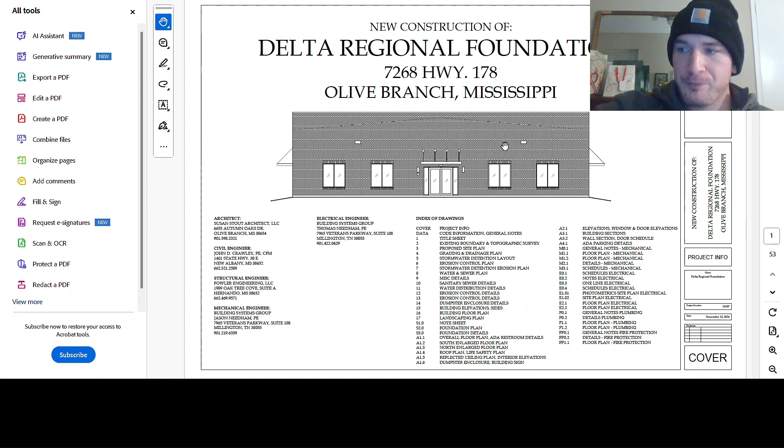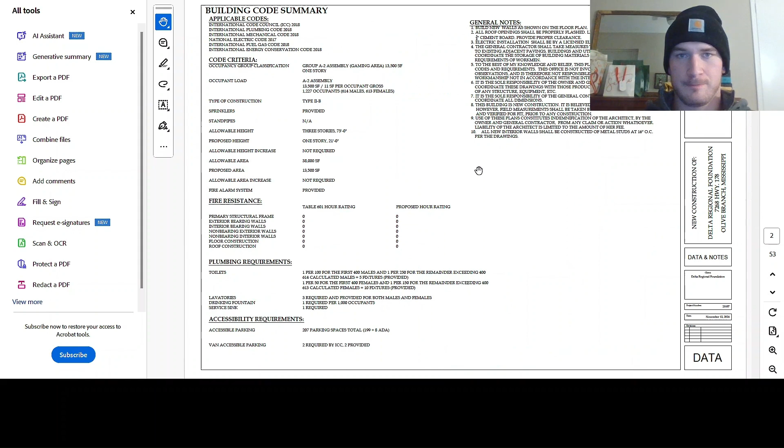First things first, Delta Regional Foundation, Olive Branch, Mississippi. Here's all of our pages, all of our architects. Cool. Talk to them if you want to. Building codes, Spanish to me. So we're near Mineral Wells. Looks like right here. I know exactly where this is. All right, so looks like we're looking at 5.39 acres.

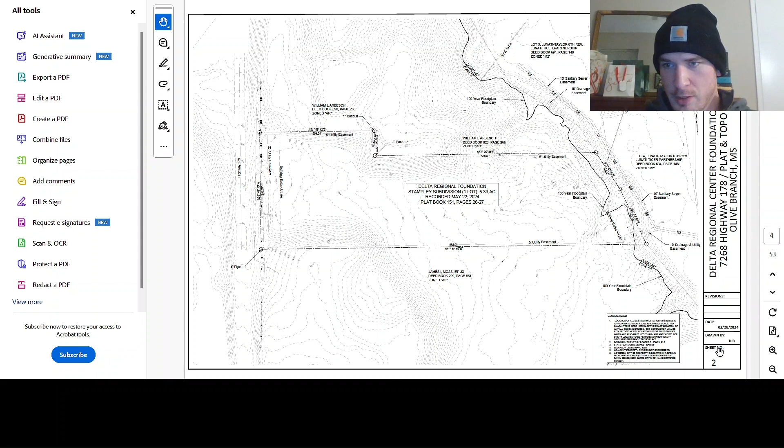I'm just looking for anything important, like say there's a bunch of stuff going on up here, maybe a bunch of utilities, anything that can get in the way that I can mess up. It's going to cost me a bunch of money because you know I don't like spending money to do jobs. I like making the money. Doesn't look like there's anything really particular here. I'm going to keep scrolling through.

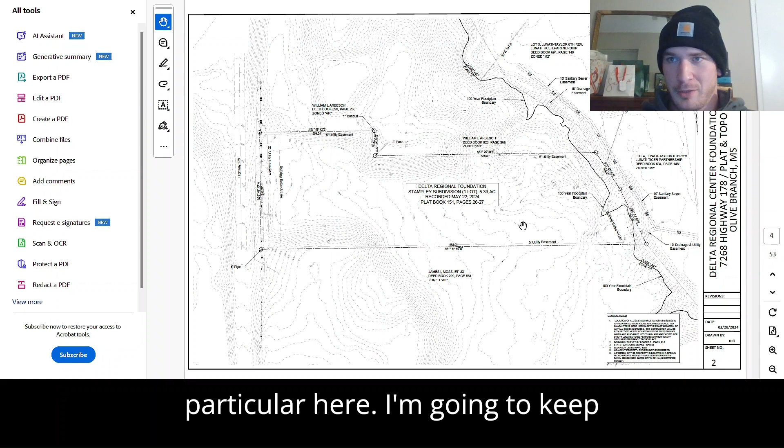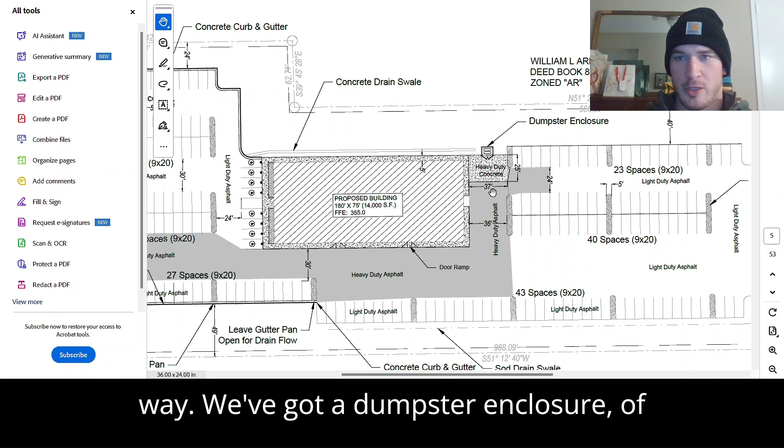All right, so here's our site plan. So let's go through and just take a look at kind of what's going on. So we got our building, 14,000 square feet. That is a pretty large building, which means this parking lot is going to be pretty big. Got a bunch of curb and gutter, concrete drainage swales. Looks like it drains out this way. We got a dumpster enclosure, of course, more parking, heavy duty, light duty. Heavy duty makes sense. This is all delivery zones.

This is all parking. So first thing I like to do is I like to look at my plan, look at my asphalt, my heavy duty asphalt. Because what we do is we'll come in and we'll do all the dirt and we'll lay all of the base rock for the parking. We don't do any of the paving, but we do lay the base rock.

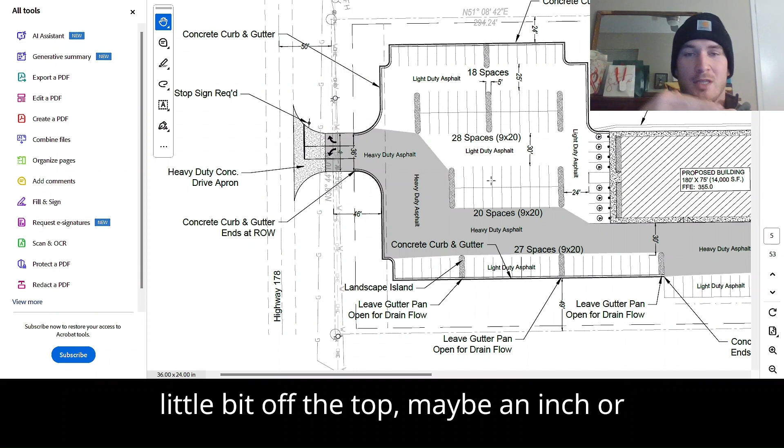And what we do is in our exclusions, we put, hey, we're going to get it as close to the level that you guys want it, but it's up to your asphalt guy to come in and do his final grade. Makes it a little bit easier on the asphalt guys. That way they don't have to lug in a bunch of machines and start trying to spread all the stuff in a confined space. We're already there doing it. All they got to do is come in, cut a little bit off the top, maybe an inch or so, move stuff around. Makes it easy on everybody.

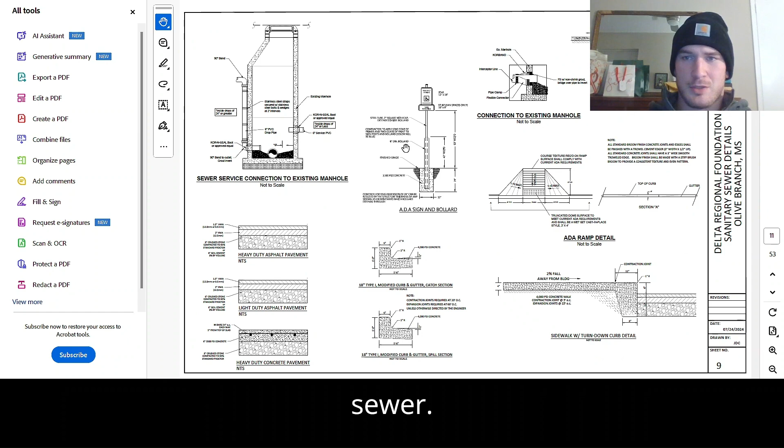So the first thing I want to do is I want to figure out how much base is going to be under this light duty and how much is going to be under this heavy duty. And then we're going to figure out how much square footage it is to see how much rock that we need. So I'm going to go ahead and skip ahead and go down to some details. This is a sewer. Here we go. Here's our pavements right here.

So we got heavy duty asphalt, 1.5 and 2, 8-inch crushed stone or 8-inch soil cement. Now, if they give the option of soil cement, I pretty much never put a price on the stone because soil cement is remarkably cheaper than putting a stone base. Now, that's not to say that they won't, but it is to say the likelihood is really low, so I try to not really do a ton with it.

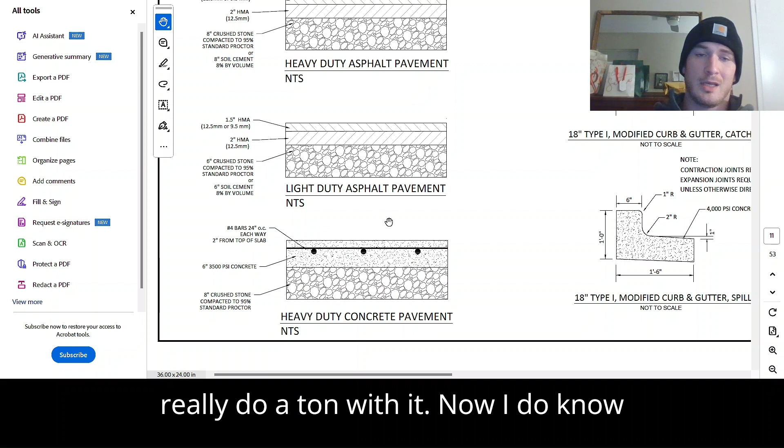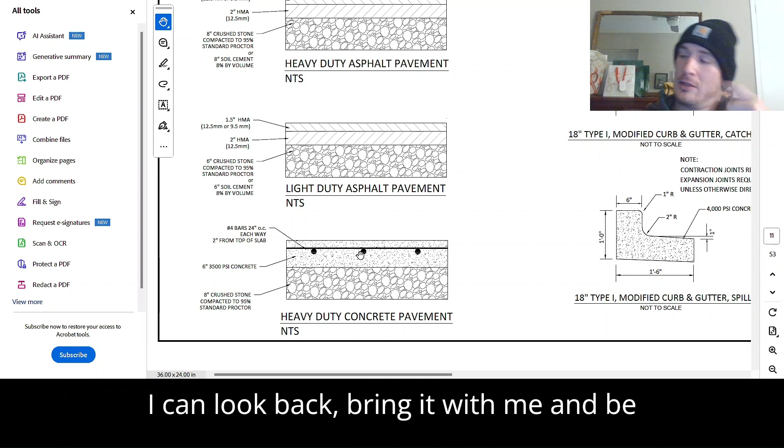Now, I do know that there's going to be some heavy duty concrete pavement, so I'm going to do 8-inch concrete base and draw a line. So I got my handy dandy notebook right here. I write everything down because what I do is I build it in my template sheet and then I have all my notes. So when I go to do the job later, I can look back, bring it with me and be like, oh, you know, I noticed this about it.

So we got our 8-inch concrete right here. I'm going to go ahead for the sake of the video. We're going to do a 6-inch asphalt base.

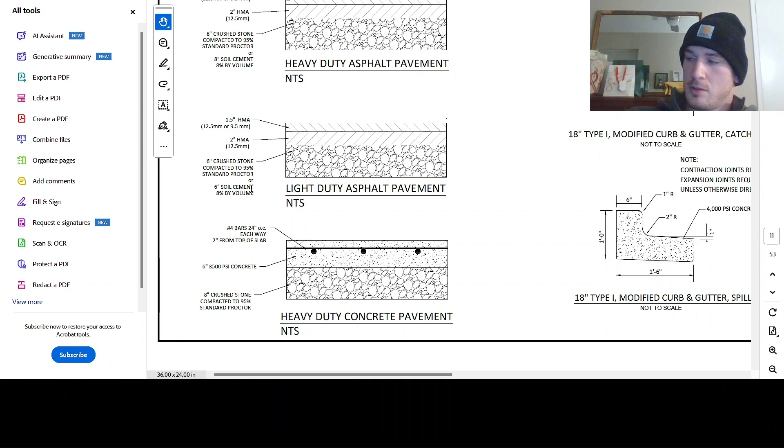And we're going to do 8-inch asphalt base. All right, now we're going to scroll back up to our site plan, down one more. Now we're going to do some measuring. So we see our scale is 1=50. I'm going to come down here to my measure objects, my measuring tool, right click, make this 50. We're not in inches, baby, we're in feet.

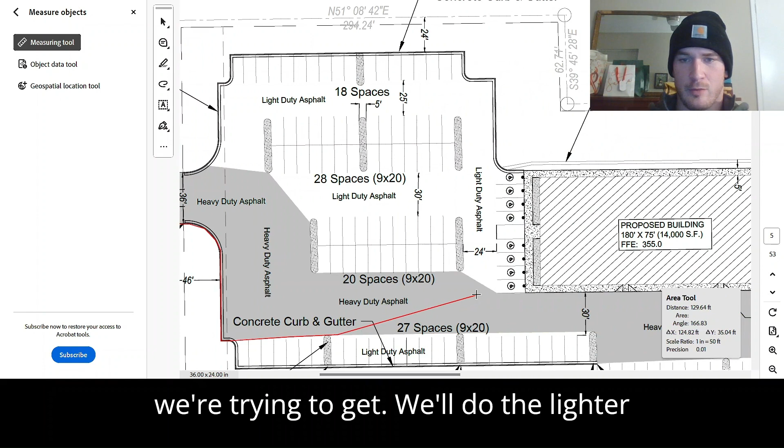Let's go ahead and zoom in. I'm going to go ahead and knock out the heavy duty asphalt first. So I'm going to hit my area tool, start to trace it out. You guys already know what's going on with this one. Again, I'm just following this shaded region because that's the only area that we're trying to get. We'll do the lighter area in a second, but for now we're just going through the heavy.

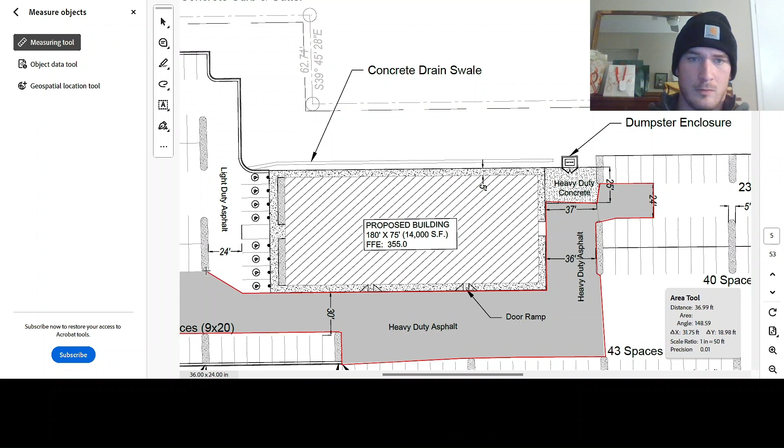So again, I'm focusing up right here just because I'm tracing lines and I went to public schools, and so it's really difficult for me. So we got 45,355 square feet. So let's go ahead and hit the math on that. Let's go ahead and pull up our handy dandy calculators. We got 45,355. Now we got to do it in inches.

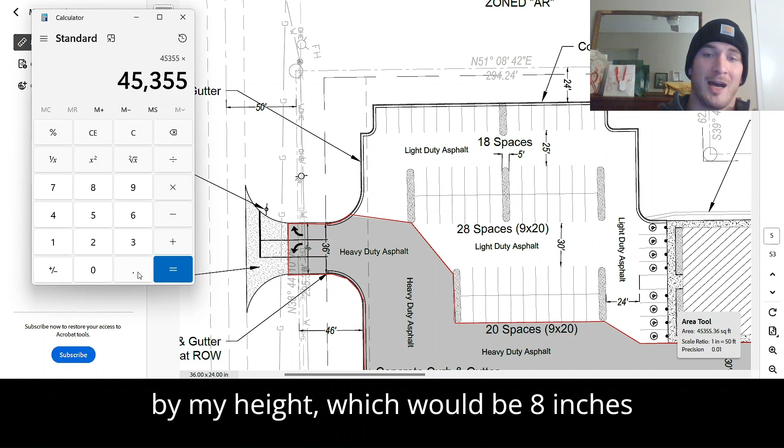If you don't know how to do inches to feet, take your inches. So in this case, we're looking at 8 inches. I'm going to go 8 divided by 12 inches in a foot. That gives me 0.667. So I'm going to take my number right here, 45,355, multiply it by my height, which would be 8 inches, 0.667. Now this is cubic feet. Again, I'm transferring this to cubic yards because that is the universal construction measurement. So I divide by 27.

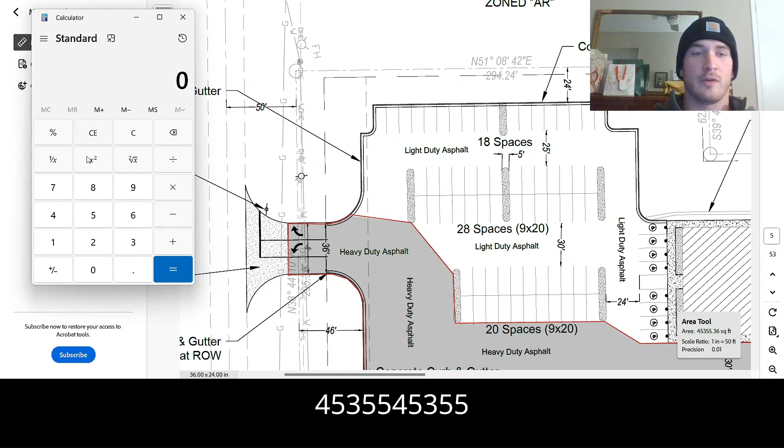Whoops. Oh man, 45,355. 45,355 times 0.667 equals, divide that by 27. So we got 1,120 cubic yards. Now, with crushed limestone in particular, it is not like a 1-to-1. So 1,120 cubic yards does not equal 1,120 tons. And you buy the material in tons.

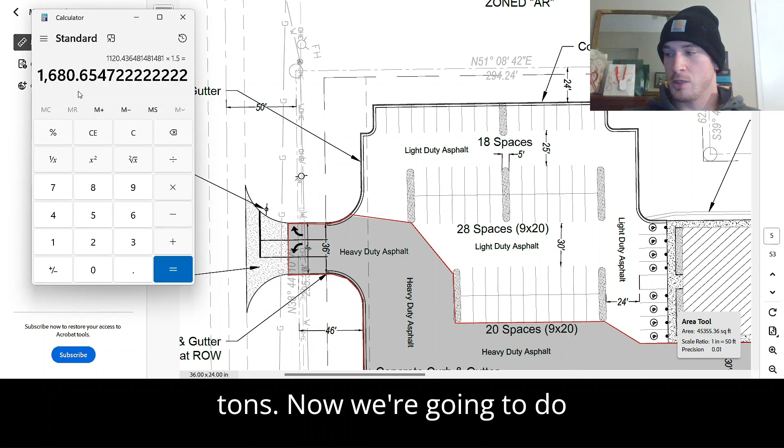My conversion factor is 50% more. So per cubic yard, we have 50% more in a ton. So I take this number and I multiply by 1.5. Now I'm at 1,680 tons. So I'm going to go ahead and write that down for my 8-inch asphalt base. 1,680 tons. Now we're going to do the same thing with light duty. Really simple, not remarkably exciting.

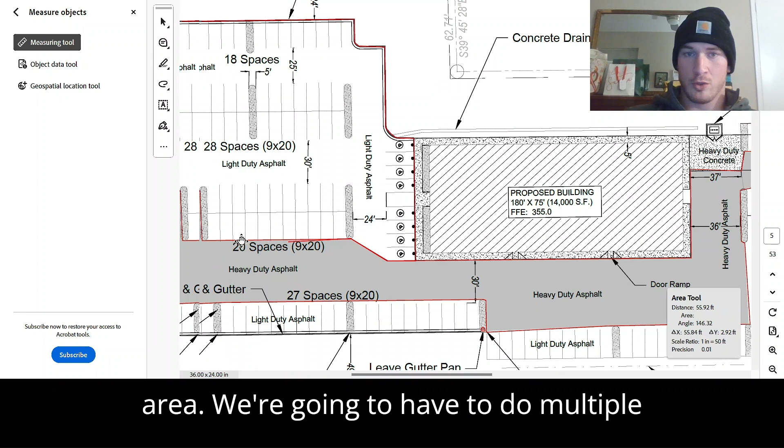Again, I'm just tracing around all of this. Here's my proposed building, so I'm going to skip that. I'm just going to hit this area. We're going to have to do multiple measurements on this one because they split us up a little bit. Follow it around, connect it up. This is about to be a lot of stone, boys. A lot of stone.

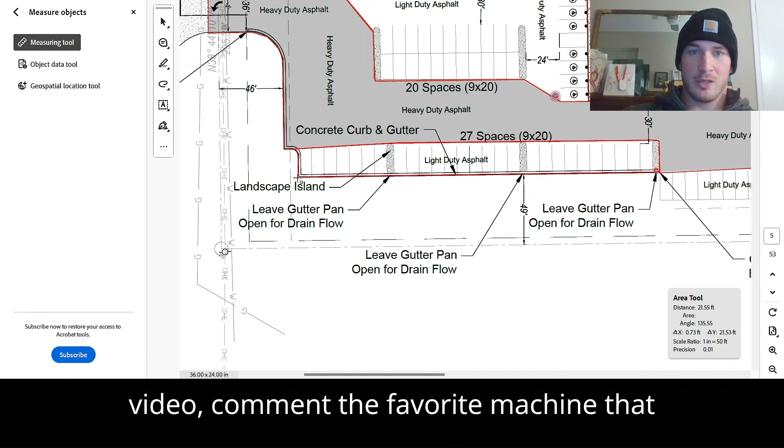Mine is probably Link Belt 210. It's like the best perfect size excavator, can knock out almost anything. You can use it for demo, you can use it for pipes, you can use it for moving dirt. 210 is just like an absolutely remarkable machine to me.

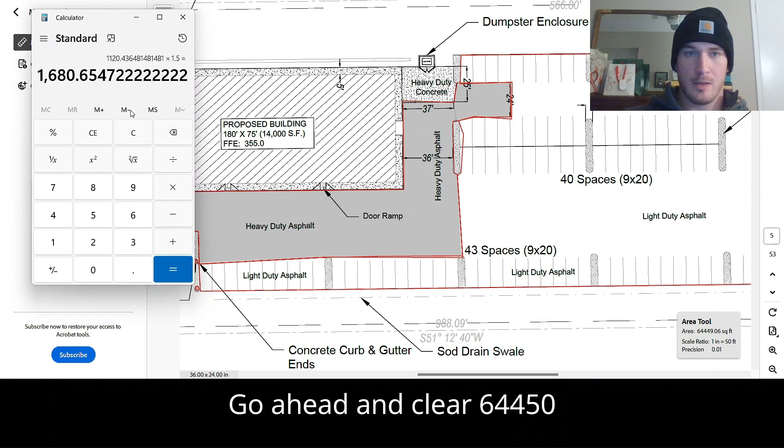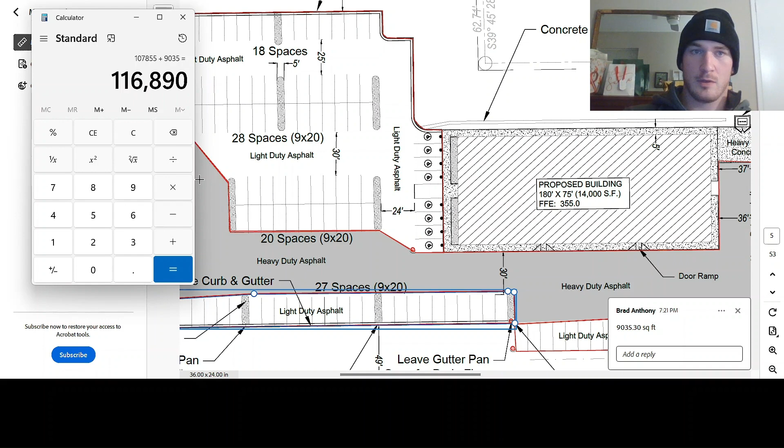Look, you guys see that really terrible tracing right there? I wouldn't worry about it too much. Mind your own business. All right, so now let's do some adding. So we got 64,450. Go ahead and clear, 64,450 plus. Let's come over here. 43,405. I'm going to add a round up. 43,405. And then we're going to hit this little section right here. 9035 plus 9035. So we got 116,890 square feet.

Again, 6 inches is half of a foot. Half of one is 0.5. Easy conversion. You don't even have to do it on here. So I multiply by 0.5. Again, divide that by 27, get to my cubic yards. We got 2164, but we're hitting our conversions. Times 1.5. 3247. Again, I'm making these notes. All right, let's keep her going. Let's go ahead and delete all these things out of here. So we're about to do a little bit of curb and gutter takeoff while we're here.

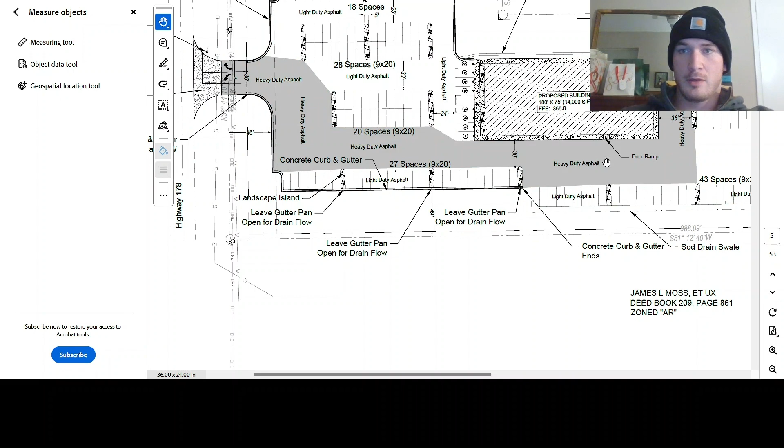Let's go back to our measuring tool. This time we're going to use this perimeter tool. It lets us trace lines and make bends in it. If you use the line tool, you're just going to run a straight line, and you're going to be like, hey, dude, I got to make 500 straight lines for me to measure one thing. Go ahead and go to that perimeter tool, big boy.

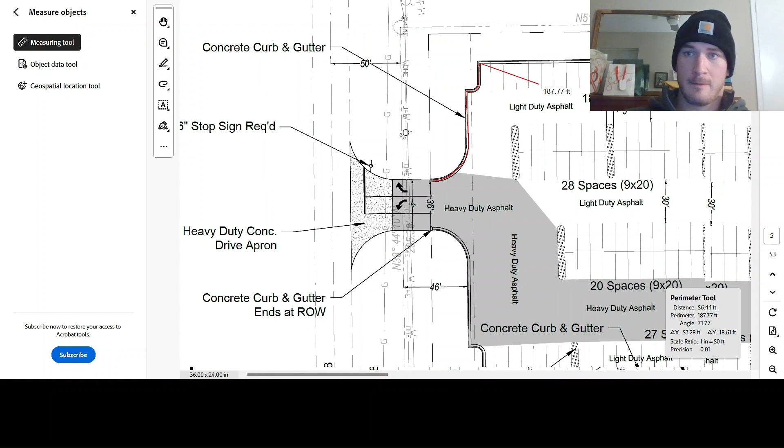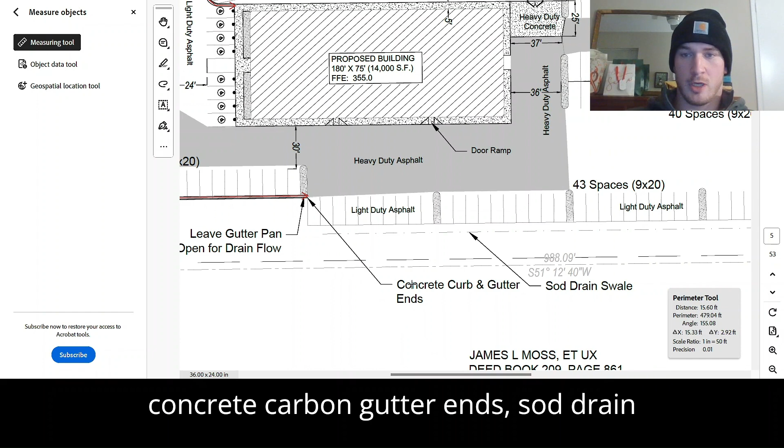480 feet of curb and gutter right there, baby. Let's go ahead and run this over. I don't really know why it looks like they stopped that curb and gutter right there, but 480 feet. Leave gutter pan open for drain flow. That's why. Concrete curb and gutter ends, sod drain swale. So they want it to be running off into this ditch. Makes sense.

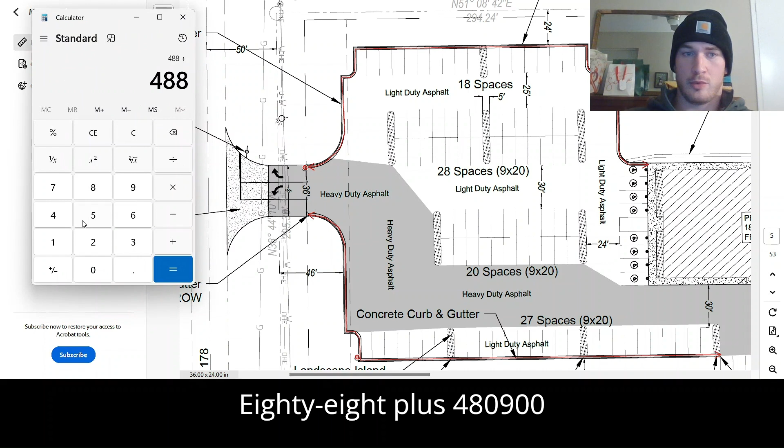Looks like we don't have any more curb and gutter, so I'm going to go ahead and make a mark of this. 488 and 480. 488 plus 480, 968 feet. So curb and gutter, 968 linear feet.

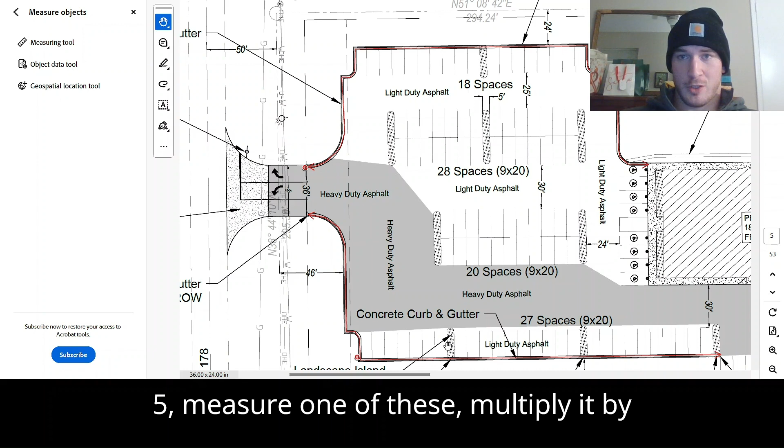While I'm here and we're doing concrete, let's go ahead and knock out these islands because they're quick and easy. Realistically, all you got to do is measure one of these and multiply it by 5, measure one of these and multiply it by 3, and then just translate it to over here. So that's what we're going to do. Measuring tool. Let's go ahead and measure one of these. About 155 square feet.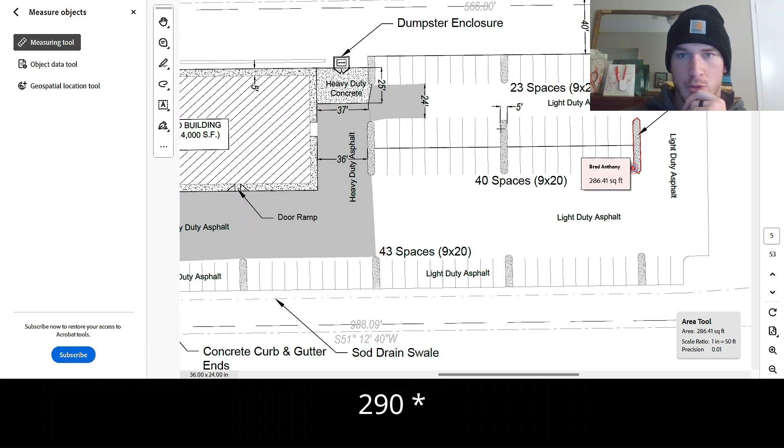Oh, good heavens. We're not going to do that. Let's go ahead and make this one real tight. Blam, blam, blam, blam. We're going to call that 290. So let's do 290 times 1, 2, 3, 4, 5, 6, 7, 8. I'm going to make a note. 290 times 8. Is that what I said? 1, 2, 3, 4, 5, 6, 7, 8. Yeah. And now we got 155 times 1, 2, 3, 4, 5, 6, 7, 8, 9.

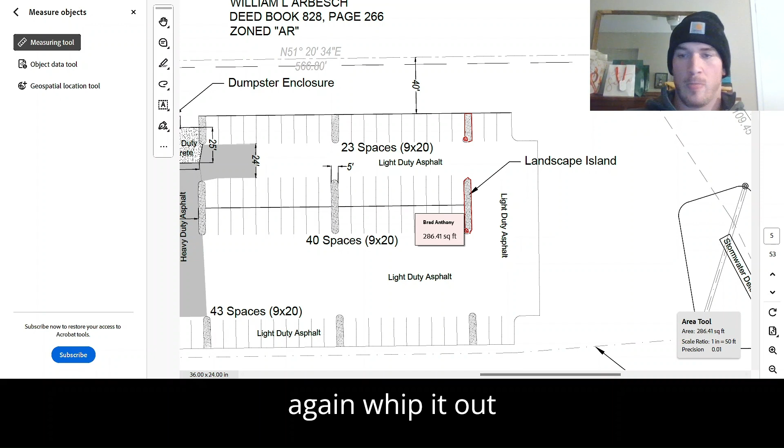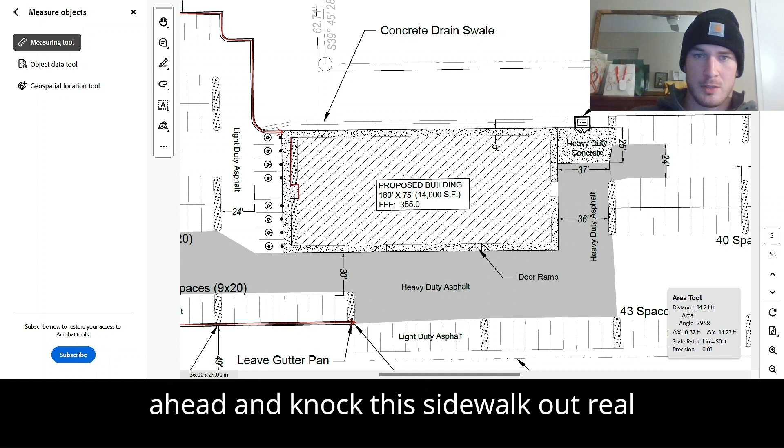While I'm here, I'm going to go ahead and do this undercut. So pretty much all the buildings, we got a little bit of sidewalk. I'm going to knock that out too. Man, I'm a little all over the place, boys. I'm sorry. Let me just go ahead and knock this sidewalk out real quick. Again, this is just me raw looking at these plans. First time, never seen them before. But this is typically how I go about it. It's a little chaotic, but we get it done.

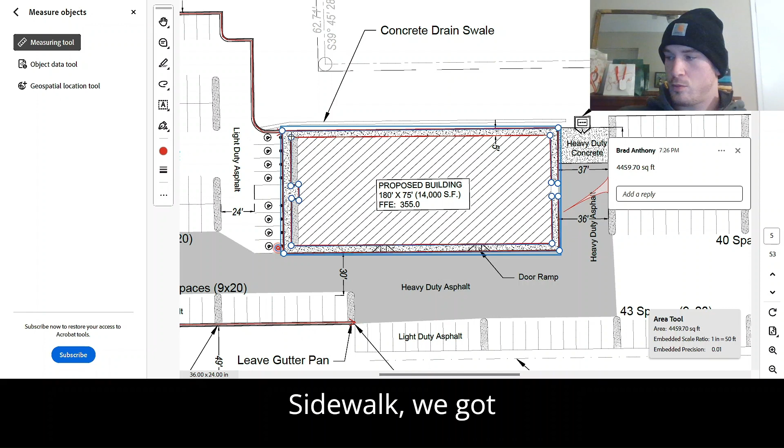Sidewalk. We got 4,460 square feet. And then HDC, heavy duty concrete. This is probably a dumpster pad. I mean, our county started doing these. 1,440 square feet. All right.

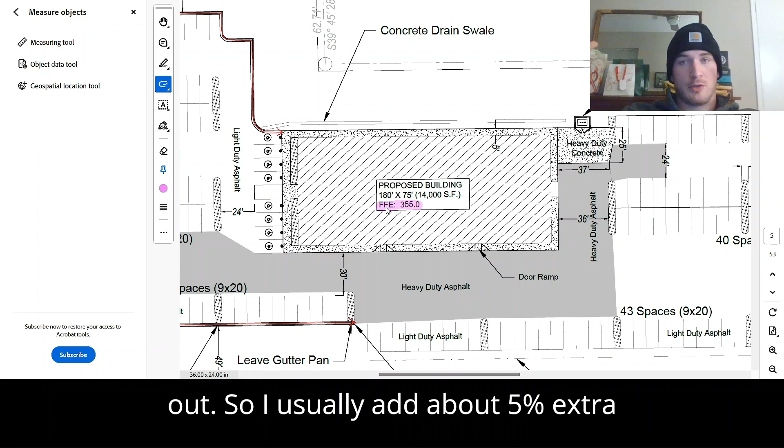So let's knock out the undercut on this building. So typically with us, we have to undercut a building 5 feet, take out all the dirt, bring in better compactable fill, tamp it up in lifts of anywhere from 8 to 12 inches. Now, we have our finished floor elevation. Let me go ahead and go to my handy dandy drawings. We got our finished floor elevation right here of 355. Now, think about when you're building the building. You have to go a little bit out. So I usually add about 5% extra because you go about 10 feet on each side.

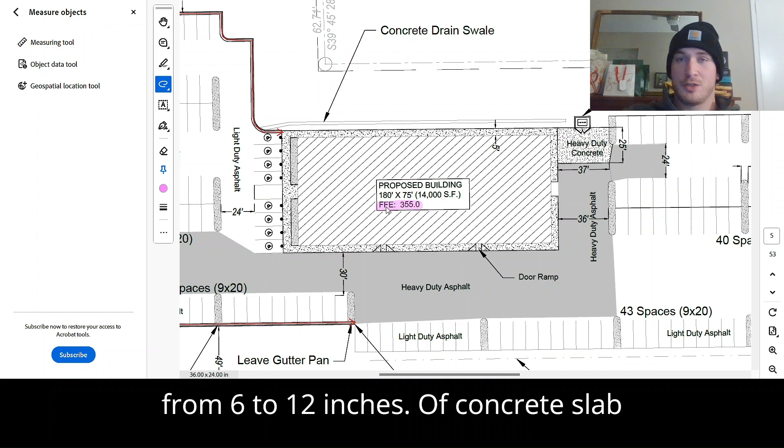Now, with 355, you have to remember I have to build my pad up about a foot or two off the ground, depending on the elevations, usually about a foot. And then I have to have about a foot for my concrete slab and the base underneath it. So typically you're going to get anywhere from 6 to 12 inches of concrete slab, and then you're going to have anywhere from 6 to 10 inches of base underneath it.

So I'm going to go ahead and do this. When I build this building out, I'm going to build this to about 354. I'm going to leave about a foot, right? Maybe a foot and a half. So what I'm going to do is I'm going to cut it down to 353 and a half. And I got to go 5 feet below that.

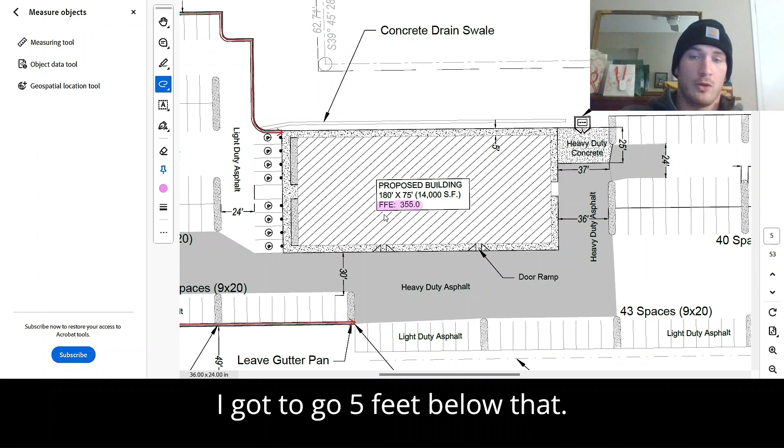So I do my 14,000. Actually, let me do it on screen. Sorry. 14,000 square feet. Multiply it by 5 foot cut. Divide that by 27. So I got to take out 2592. So I'll write down my building pad. 2593 cubic yards out.

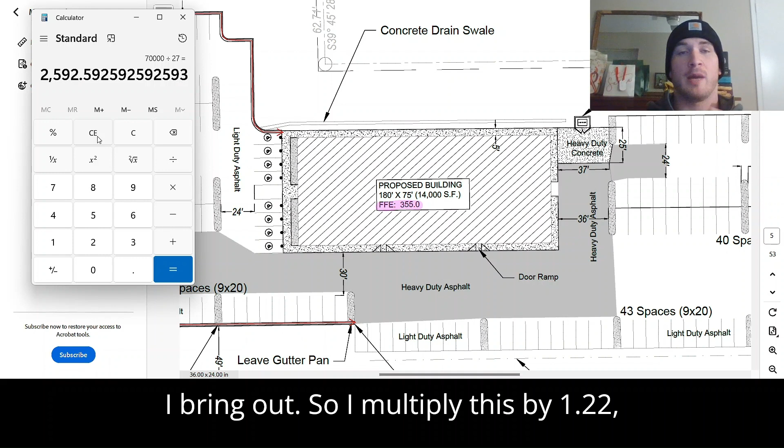Now, again, my dirt is 1-to-1 now with cubic yard to cubic yard because it's the same material. But when I bring it back, I have to compact it. So when I compact it, I need about 22% more material than I bring out. So I multiply this by 1.22. I get 3163. That's the easiest way to knock out these buildings.

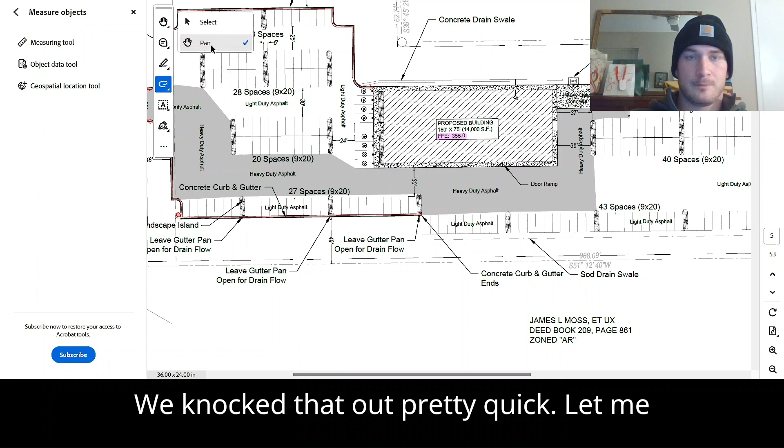All right, let's move on to our next one. We knocked that out pretty quick. Let me zoom out. Looks like we're looking at underground utility locates, concrete inlet, concrete swale, pipe invert. Does this have a chart? Reinforced concrete pipe. That's an arch pipe. All right, I'm going to go ahead and highlight this right here because we're going to need that. And it's got a flared end section.

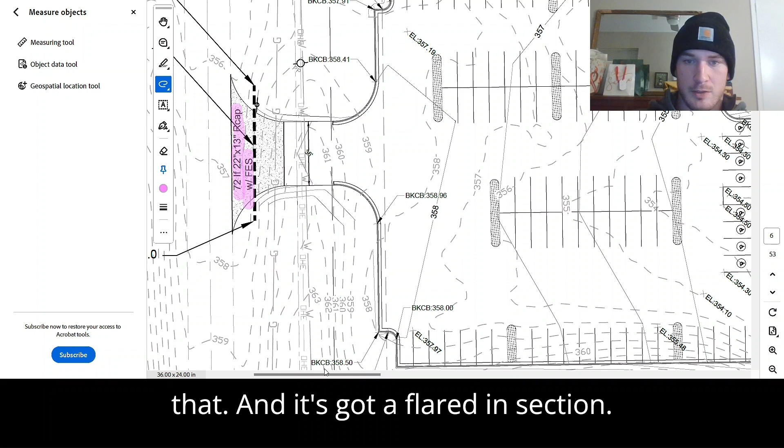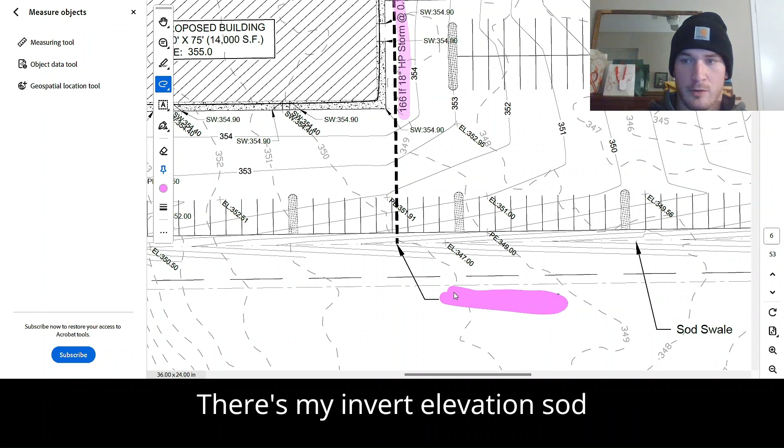Yeah, so it looks like they're not going to be using a lot of underground stuff. So that's a yard inlet right there. Concrete swale probably pours out to here and it hits this. 166 linear feet of storm. Here's my invert elevation. Sod swale. 3-to-1. We got a big old pond over here. Let's go ahead and take a note of that. This looks like an outlet control structure. They didn't notate it, so it's probably not that important for this project.

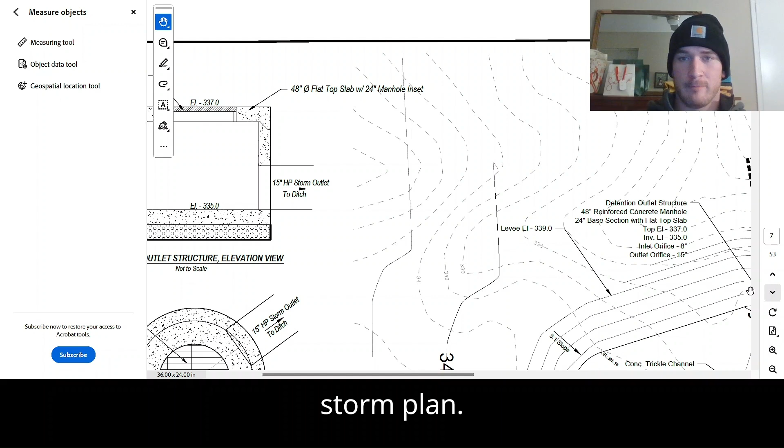But yeah, it looks like everything's just going to be pouring off of this side. So we're at 365. We come down to here. We got 350. Yeah, we got a 15-foot drop from over there. Everything's going to be coming out this way. All right. Well, that was an easy little storm plan. Yeah, here's that outlet structure that it was talking about. Here it is. Second page.

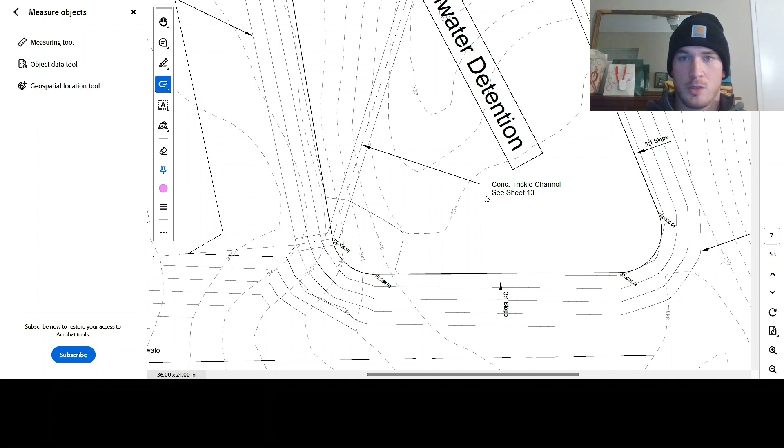Let's go ahead and... manhole, flat top slab. 36 feet of 15-inch HDPE. Concrete trickle channel. Levees at 339. 339. Yeah, it's just an outlet control structure. Cool. These are really easy. All right, what we got now?

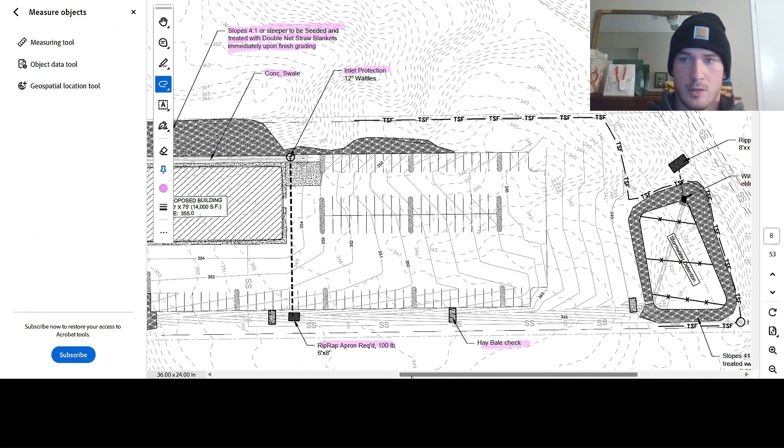This looks like erosion control. Construction entrance. We got silt fence. Double net straw blankets and seed. We got riprap, hay bale check dam, inlet protection, swale, seeded and straw blankets, riprap apron, outlet pipe with concrete. Easy money. This looks like a straw bale too. I'm gonna go ahead and highlight that for it. Looks like another one.

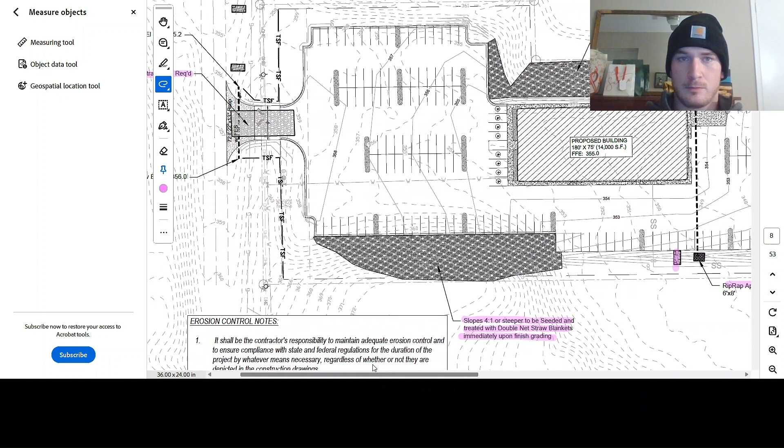Another one. Another one. DJ Khaled.

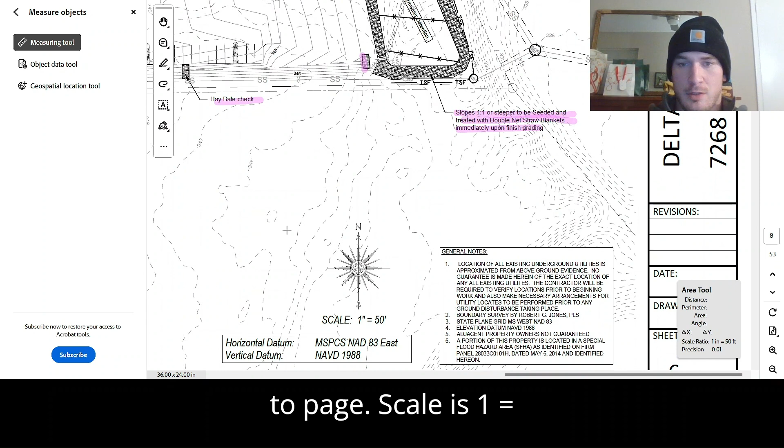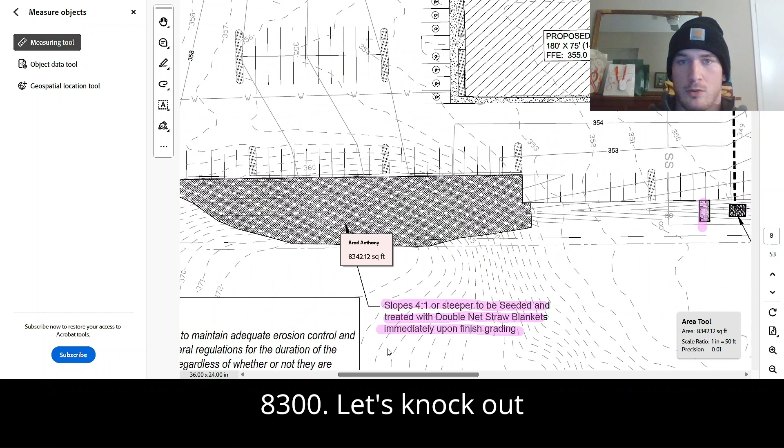All right. So let's get the measuring out of the way. Now look, always double check your scale because sometimes they change page to page. Scale is 1 equals 50. Scale is still 1 equals 50. So let's get our area of all of this seeding. It's going to make it difficult. There we go. 8,300. Let's knock out this area. Cool. And one more.

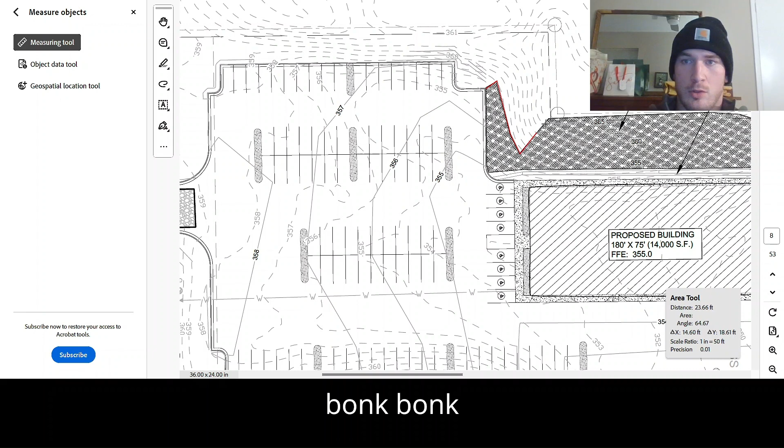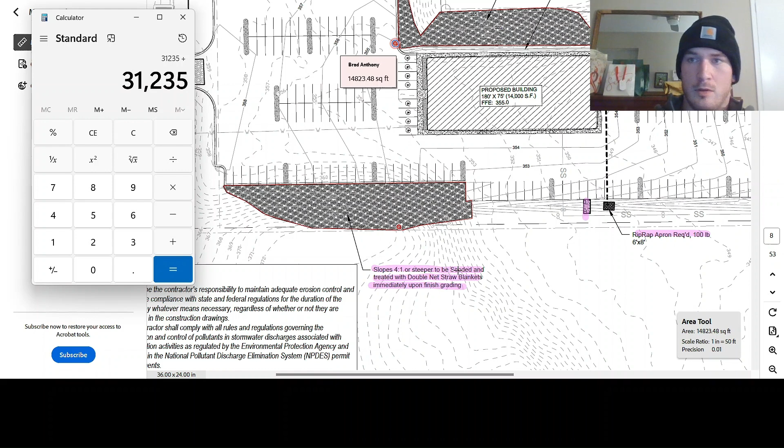This is the absolute joy of estimating dirt work, construction, civil, whatever you want to call it. Running through, grinding these away, making sure that you get all your numbers right. All right, so again, handy dandy calculator. Clear it up. 16,410. 14,825. And 8,345. 39,580.

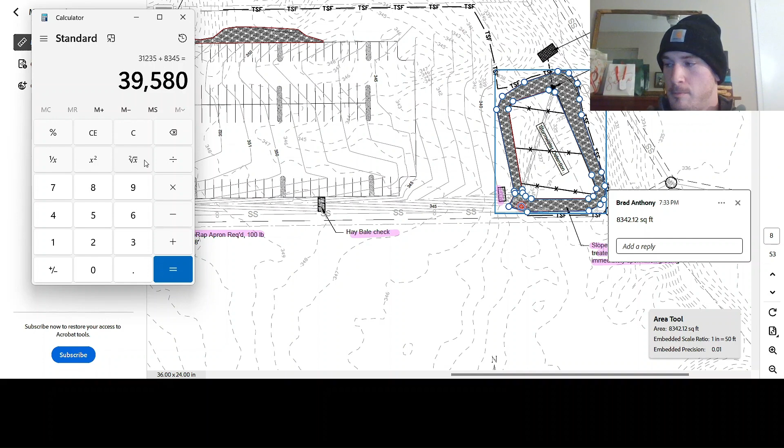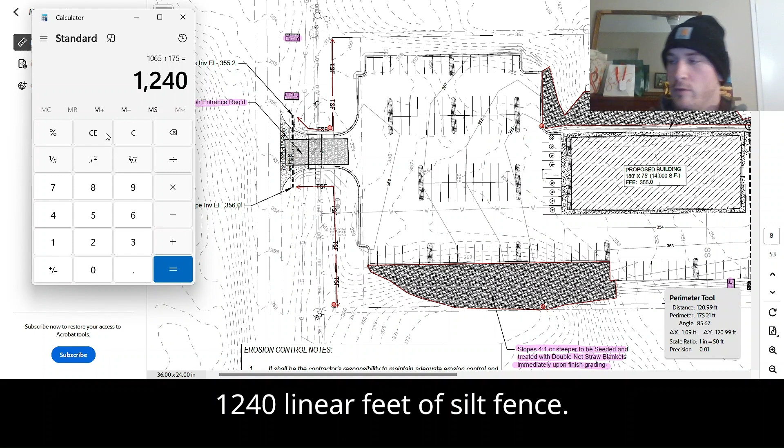Next, we're going to hit up this silt fence real quick. Everybody's favorite item. I'm going to call that 855. A little bit more fence up here. 855, we'll call that 210. 1,240 linear feet of silt fence. Easy money.

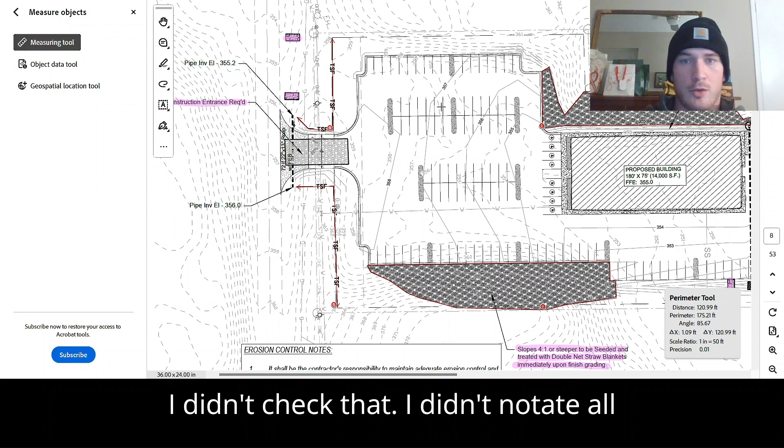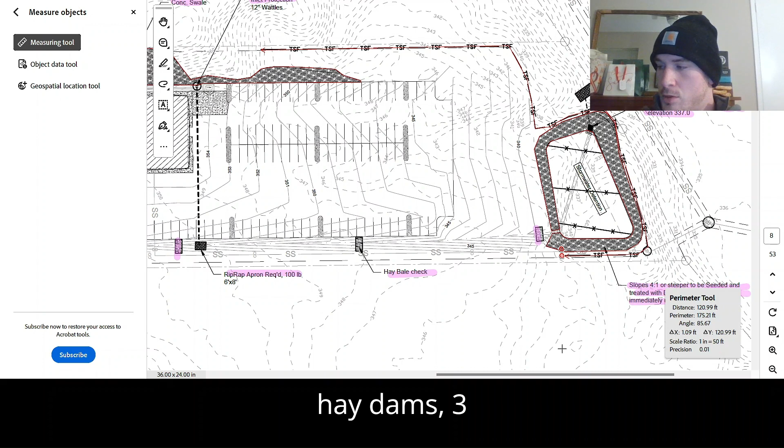One construction entrance. I didn't notate all this pipe. I gotta go back and do that real quick. So inlet protection. 1. We got the seed. We got 1, 2. What is it? 3 hay check dams. Hay dams, 3. Riprap. So we got 8 by 12, 6 by 8.

So 8 times 12, 96 plus 48 square feet. Again, this is my square footage for this riprap. It's usually 1.5 feet deep. Divide that by 27. Now with riprap it's big rocks and there's no fill material between it, so it's not really compactable. So you have to use a bigger conversion number. I use 1.8. It's 14.4. I'm going to put it to 15 tons.

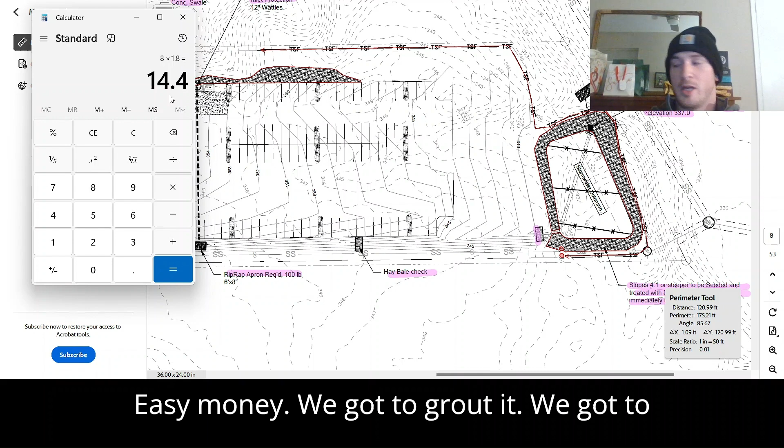Easy money. We got to grout it. Grout's literally just like cement. Pour it on the top, makes it a smooth surface so the water doesn't run through it. Really easy.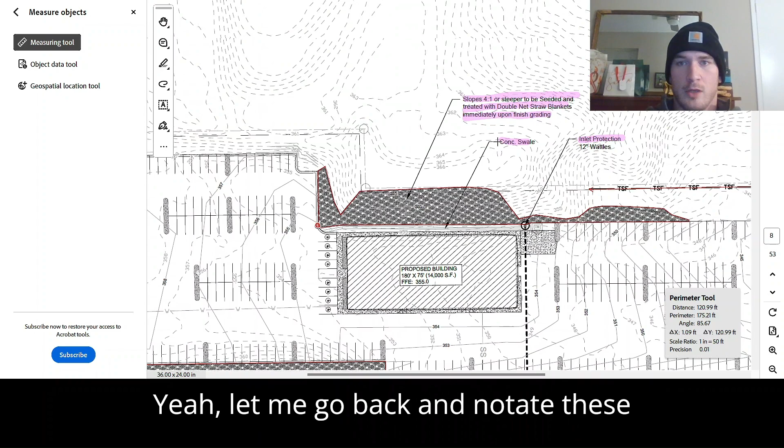Yeah, let me go back and notate these pipes real quick because I forgot to do that. We got 166 feet, 18-inch HP, 166 linear feet. I wonder if there's a head wall or anything on it. I don't know.

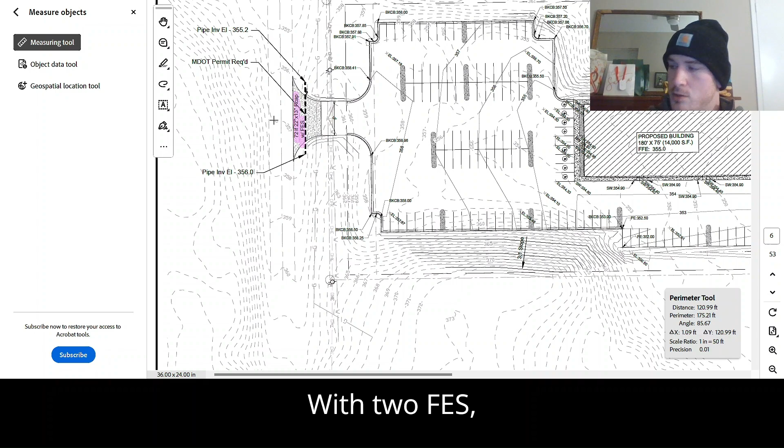72 by 22 by 13. Oh, 72 linear feet. Okay. So we got 22 by 13, 22 by 13. Arch pipe. We got 72 linear feet with 2 FES. Easy money. Keep it going. We hit our erosion control.

We hit our drainage. The guy that I'm bidding this for doesn't really want to do any utilities, so I'll probably just leave those off.

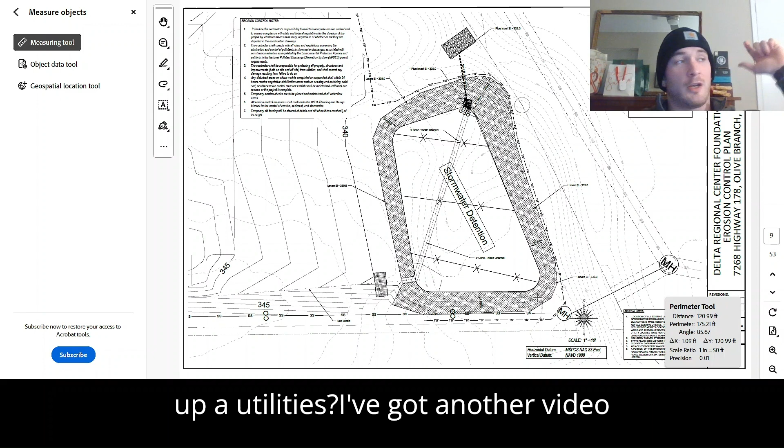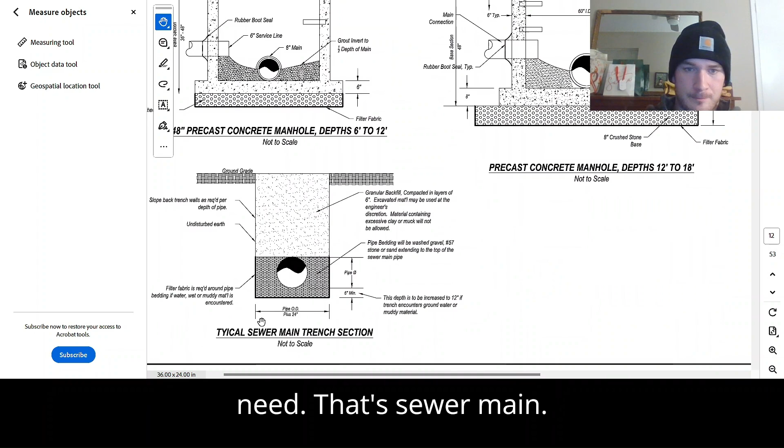All right, let's see what we got. Again, this is me just never seeing these plans. Fire department connection is all water, water, water. Sewer, dumpster enclosure, cleanouts, easy. Connect to existing, ADA signs, asphalt, service connections. So let's go ahead and look at our pipe installation so we can check what all we need. That's sewer main. Don't need a sewer main. It's all water.

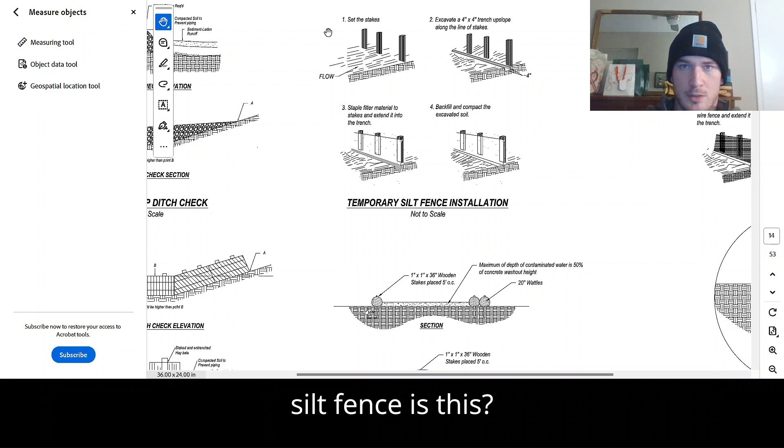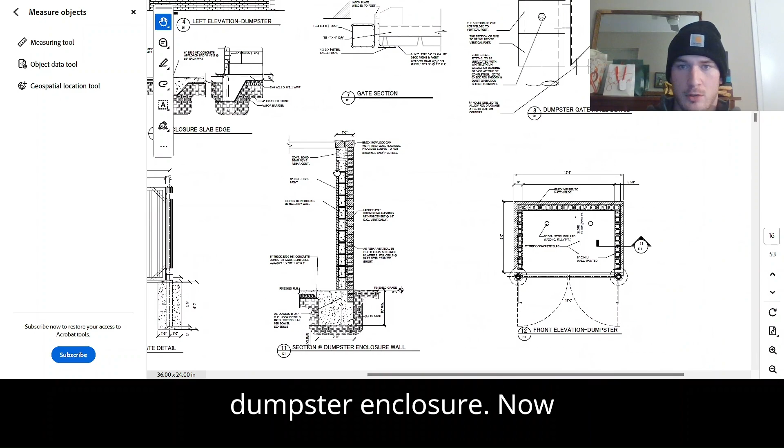Riprap ditch, silt fence. What kind of silt fence is this? Standard silt fence. Wire back, you can lose some money on. Hay bale ditch check. Straight up hay bales with stakes in it. Straw mat slopes. Dumpster enclosure. Now we're getting into our architectural plan, so I probably missed that pipe detail. Let me just cruise through this real quick.

Sewer, ADA. Manhole, manhole, manhole. Sewer trench. It's probably going to be the same. Granular backfill. That means gravel. Pipe bedding, wash gravel, number 57, or sand. Sand is very important because sand is a lot cheaper than rocks. Filter fabric required around pipe bedding if water, wet or muddy materials are encountered. Okay. Sand is cheap, and you only got to backfill to the top of the pipe.

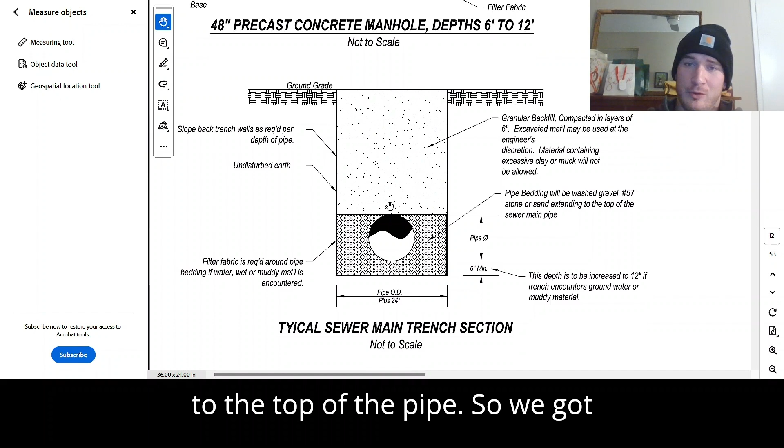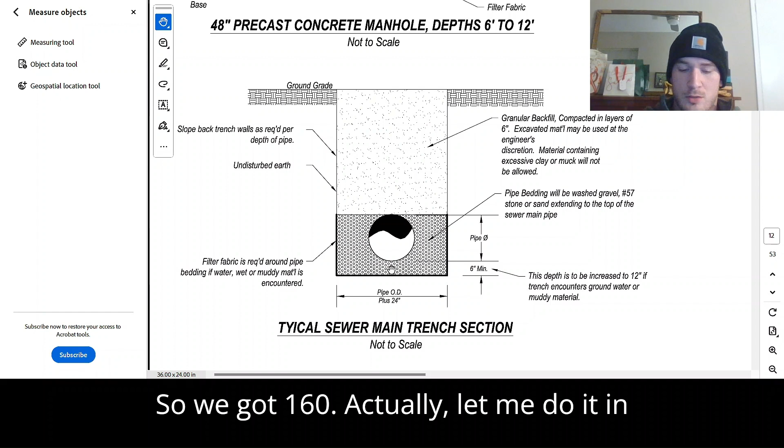So we got 18 inches. We got to go 6 inches below that. So we got to go 24. So 2 feet of fill, basically. I can do some quick math on that. So we got 166. Actually, let me do it in front of you, man. Here I go again.

166 feet. Multiply it by, let's say we do a 4-foot trench. 4 foot wide. Multiply it by 0.5. Again, divide that by 27. It's crushed material, actually, it's not crushed. It's granular material. So we're gonna do 1.6. So we're gonna need about 20 tons. 20 tons for base.

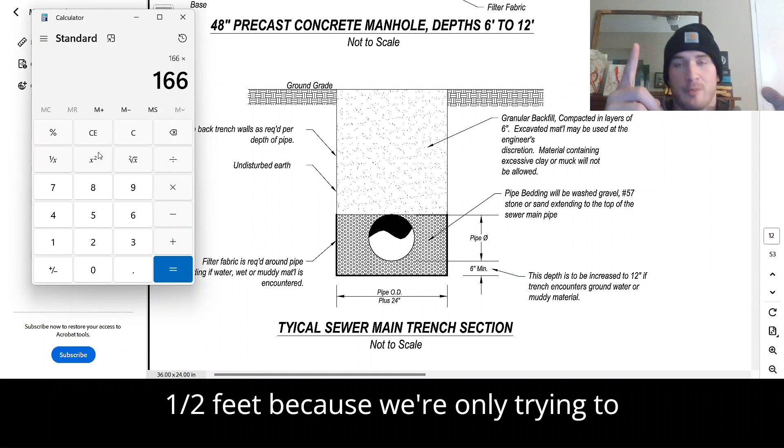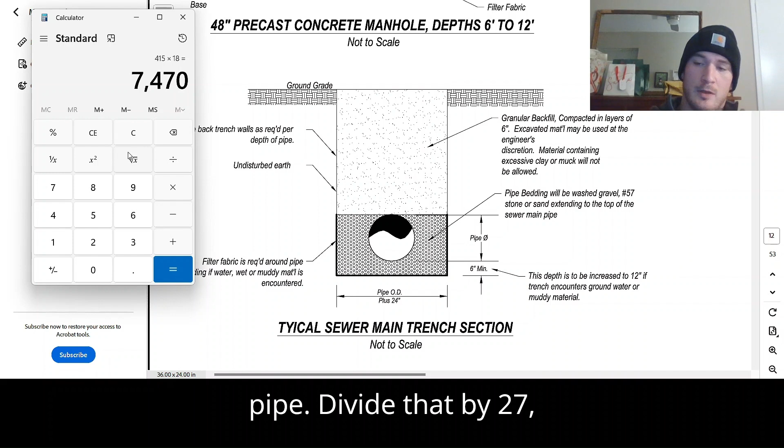Now we're going to do our 166 feet, multiply it by the width of our trench minus the width of our pipe. So we got a 4-foot trench and our pipe's 1.5 feet because we're only trying to fill in these side areas. We're not trying to fill in the area with the pipe. We're only going to go up to the top of the pipe. So we do our trench, which is 4 minus 1.5. So we go 2.5. And then we multiply that by, we're going up from the base. So it'll be 18 inches because it's to the top of the pipe. Divide that by 27. Multiply that by 1.6.

Let me do that again. I think I might have messed something up. 166 times 2.5. And then multiply that by, oh, I did 18. Yeah, it needs to be 1.5. Divide that by 27. Multiply that by 1.6. So about 37. 37 for backfill. Easy money, baby.

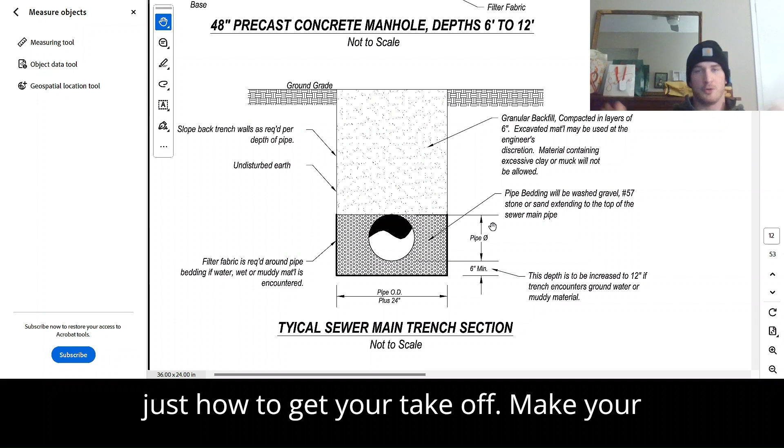So that's short and sweet. Really, just how to get your takeoffs, make your notes. I have a preset template that I would load everything into. I'll build out all my pricing.